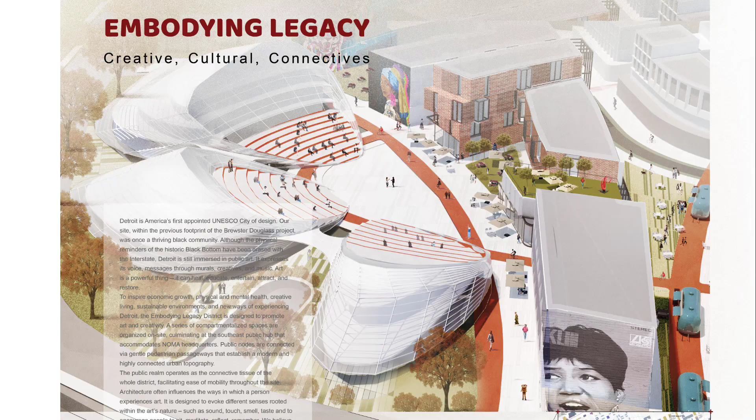Detroit hustles harder, a simple concept but a powerful phrase. It embodies the spirit of the city whose people have created an entrepreneurial and innovative culture despite countless historic setbacks. Brush Park, the previous site of the Brewster Douglass projects, is one of many neighborhoods that exemplifies how the need to hustle came to be.

The current state of the site is attributed to a history of neglect and disinvestment from various institutions. The historic Motown was developed and refined in the towers of the Brewster Douglass homes. With notable residents like Diana Ross, Mary Wilson, and Florence Ballard, the Brewster Douglass homes were a hub for Black artists and musicians. In the 1960s, the construction of Interstate 75 next to the Brewster Douglass homes uprooted countless BIPOC individuals, families, and communities that were essential to Black Detroiters' culture and economy.

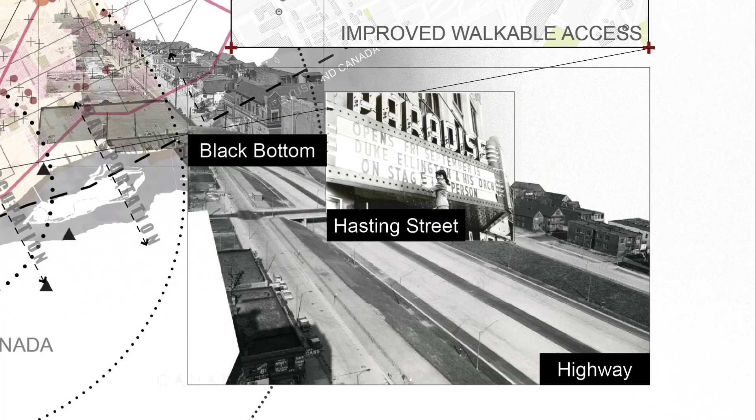Now, the empty site serves as an exemplary location to design a community that celebrates Detroit's rich history and embraces BIPOC artistry and entrepreneurship. Historically, our site had a significantly lower household median income than Detroit as a whole. Currently, the income is higher, reflecting a more affluent population entering the new Brush Park housing development.

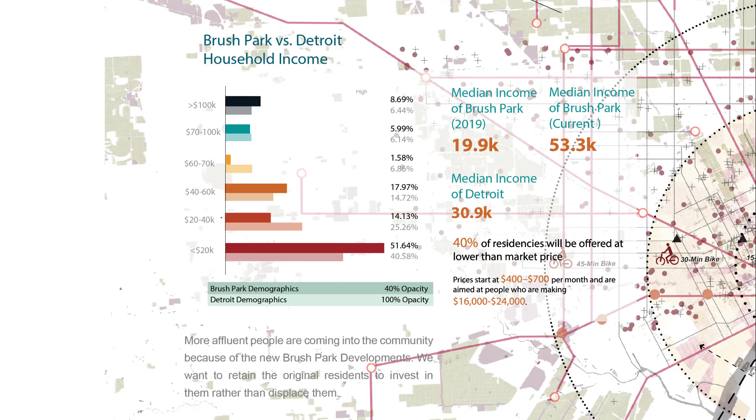Our project wishes to dismantle the history of neglect by creating a space to invest in the original residents rather than to displace them. We are proposing that 40% of the residencies will be offered at lower than market price. The monthly rent will start at $400 to $700, aimed for people with an annual income of $16,000 to $24,000.

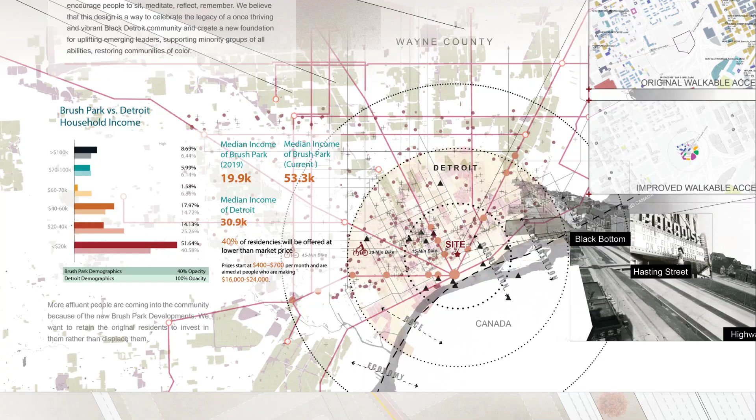Brush Park is a gathering point of crucial educational facilities, landmarks, and transportation. It was crucial to design a campus that allowed for access to these existing amenities as well as introduce new ones. We employed different key design strategies to improve the experience of our residents. Our program arrangement provides a complete community with a 5-minute walkable access to health, education, grocery, job amenities, and services. These resources are located on the ground floor throughout the campus to encourage connectivity and foster social interaction among the community.

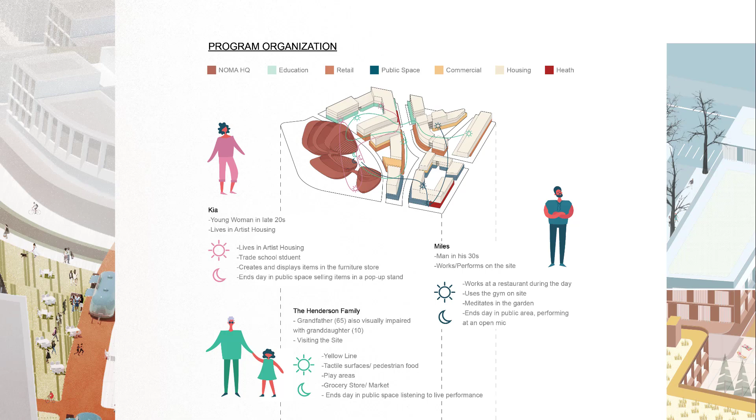The design facilitates the lives of people like Kia, Miles, and the Henderson family. Although their daily lives and abilities are significantly different, the neighborhood supports their needs and interests. To support local artists, murals and public galleries are placed in high pedestrian traffic areas. Established events in the community include picnics, festivals, garage sales, neighborhood cleanup days, and food truck parks to encourage residents to gather together and support local businesses.

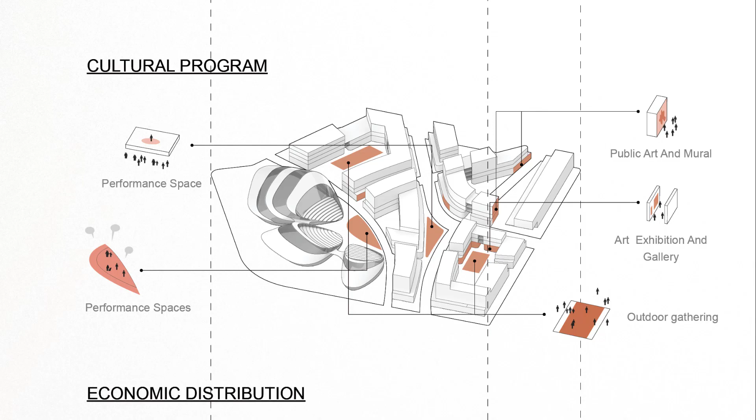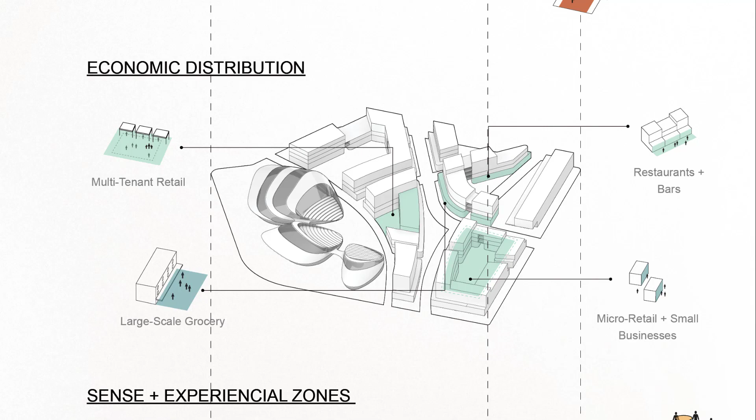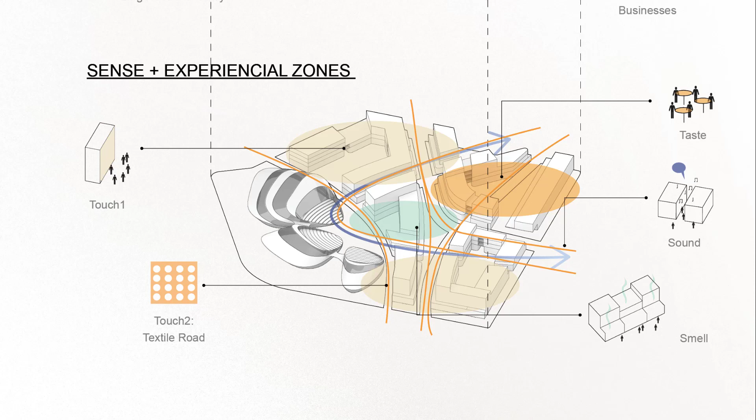In each programmatic zone, there are different scales of retail. From pop-up shops to large-scale grocery stores, the neighborhood supports many types of entrepreneurs. Different areas of the site hone in on a human sense: sight, touch, smell, taste, and sound to provide an engaging experience for the residents and visitors. Utilizing the senses also serves as a navigation tool for those with disabilities. Sensual design removes barriers and promotes inclusion and social equity, especially amongst vulnerable communities.

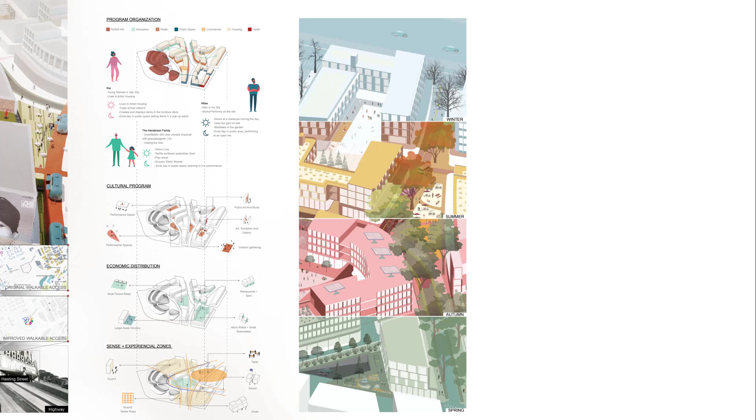The design is responsive to the seasons to maintain a quality experience for residents all year. For example, while a pool can be occupied in the summer, it can be adopted as an ice rink in the winter. Because Detroit experiences all 4 seasons, making each space usable throughout the year is crucial. The integration of the community into the surrounding context is done through the connection to the Joe Louis Greenway, a currently developing project, and by providing mixed-use residence on the northwest of the site. The porous plan allows multiple entry points to the adjacent neighborhood through bike and pedestrian lanes.

Within the site, cultural strips full of art and music lead up to the central hub that accommodates the NOMA headquarters, healthcare center, and trade school. This anchor point lies on the edge of the highway and addresses the community's 3 main programmatic components: culture, health, and education. Its organic nature softens the boundary with the road and provides enclosed spaces for public gatherings. In order to encourage pedestrian use, a one-way car access in the northwest provides quick, easy access, while 3 underground parking garages allow residents and visitors to park and enter the site on foot.

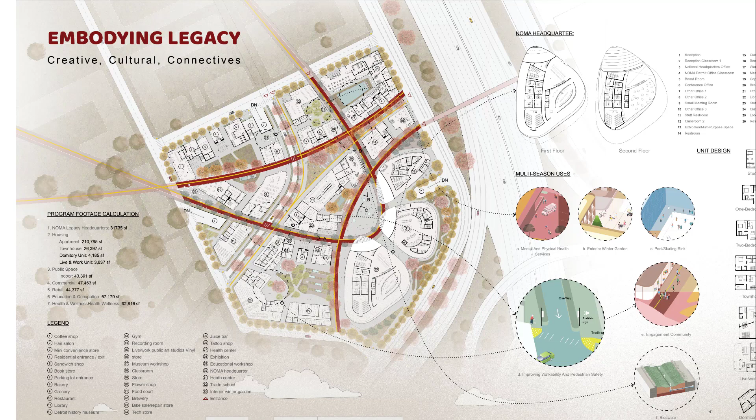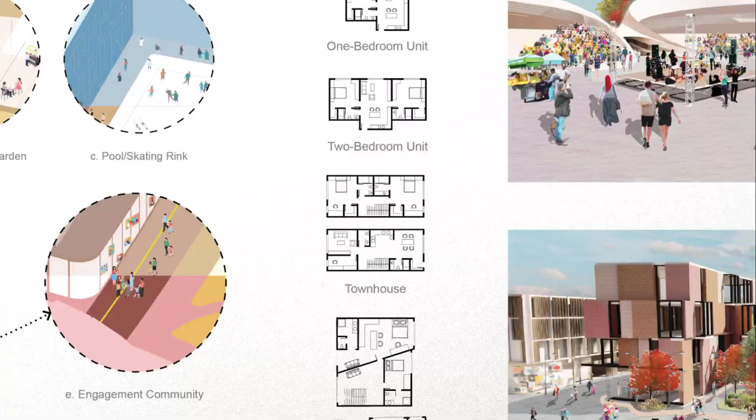Throughout the community, public nodes are linked into a network of gentle pedestrian passageways and bike lanes, creating a new, highly connected urban topography. As for the landscape, trees are placed strategically in places that would create welcoming environments while improving the biodiversity of the now vacant parcel. The incorporation of swales and green roofs also assists in stormwater management in order to avoid flooding in walkable areas. The pedestrian streets promote a communal gathering of all people.

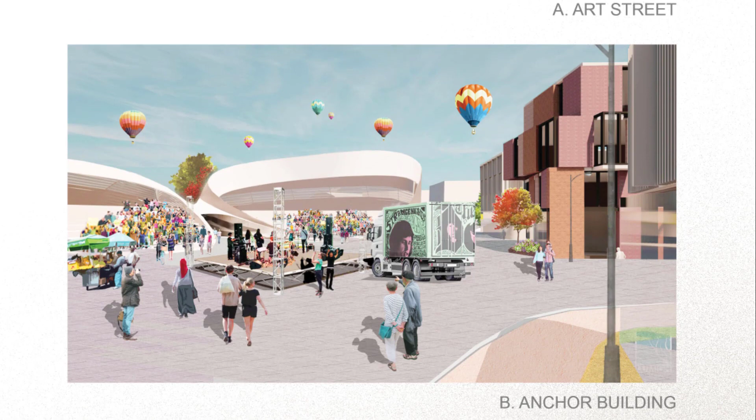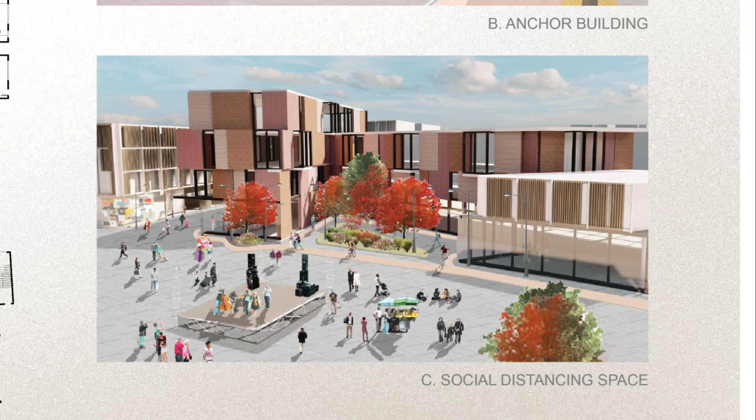Walking along one of the cultural strips towards the NOMA building, one can experience street artists painting, a public art exhibition, or local musicians performing. The gathering space in front of the anchor buildings supports large-scale performances and events, as well as a dynamic congregation space on the steps for tourists and residents alike. Turning around, one can notice the large outdoor gathering spaces between programs that facilitate safe social distancing. In all, we wish to design a community that invests in the original residents while embodying the legacy of the site as a thriving cultural hub.